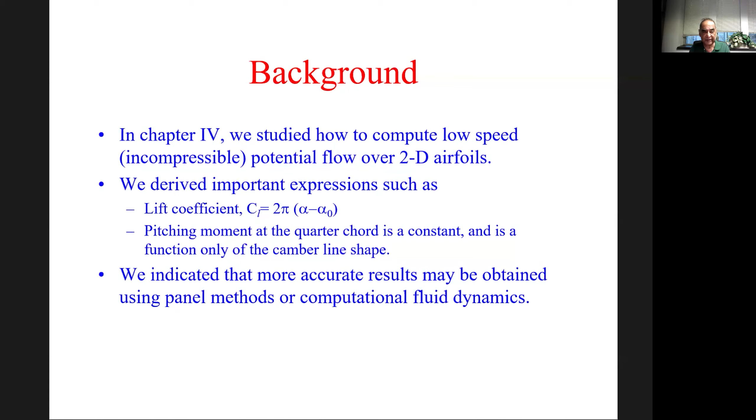Panel methods is used in X-Foil, you already practiced it, X-Foil work. CFD, we won't have time to practice it in our class, unfortunately, but we have a graduate course on CFD where they talk about a lot of the theory behind it. So let's quickly review what the two-dimensional theory gives us.

Basically, thin airfoil theory comes up with this dotted line for lift versus alpha, where it crosses the x-axis, where the lift coefficient goes to 0, is called the zero lift angle of attack, alpha when lift is 0. The slope is 2 pi when alpha is expressed in radians. Of course, in the real world, because of stall, the airfoil stalls here, and also stalls at negative angle of attack. If you keep pitching an airfoil up, it's going to separate on the top surface and stall there. If you keep pitching it downwards, it's going to stall on the bottom surface. So the black curve may have a slightly different slope.

So in our lecture in this class, we are going to call this A naught. A naught may be slightly lower than 2 pi. So if in an assignment, problem set, exam, or in your industry practice, this slope is available from experimental data, that's what we would use. But in the absence of experimental data, we will assume that the slope of the lift versus alpha in 2 dimensions is 2 pi.

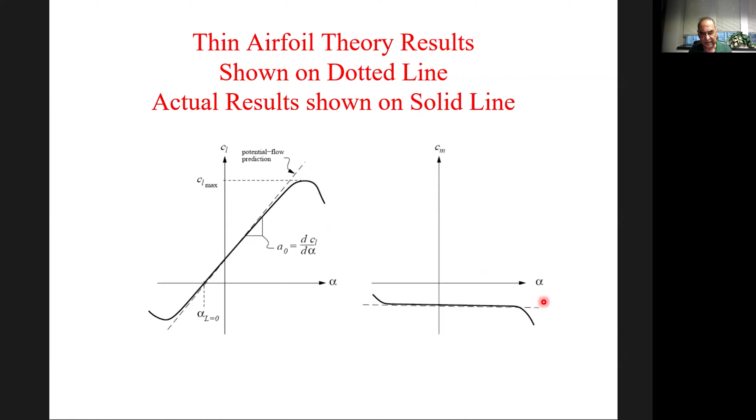Our thin aerofoil theory or a pure panel method will not give us drag. If you want drag, you have to go to boundary layer theory, some way of telling where is the laminar flow, where is the turbulent flow. We need some way of telling where the flow is separating - all that information should be known. Then you have to either numerically integrate the boundary layer equations, which are PDEs, or some integral form of the boundary layer equations. I promised to tell you how X-foil does the boundary layer, but I have to defer that. Maybe I'll just post it as a module for information purposes, because our course is primarily focused on inviscid flow, and I don't want to sidetrack into different venues where we may lose track of where we are.

But anyway, there's a minimum drag value. We came up with a very important concept called the drag count. Drag count is 0.0001, so it's the 4th significant digit - that 1 is called the drag count. When we plot this curve, it's very important to scale the vertical axis so we can resolve the drag variation from aerofoil A to aerofoil B. Otherwise we're going to be in bad shape - we won't know what's going on because they'll all look the same in this plot.

So this is not given by inviscid theories at all - you need boundary layer behavior. Why does the drag shoot up here? Because of the stall - same way it's because of the lower surface stall. Sometimes you'll get a bucket-like shape. We call it a laminar drag bucket because the drag is mostly laminar flow, then suddenly the drag jumps up. So that's called a laminar drag bucket.

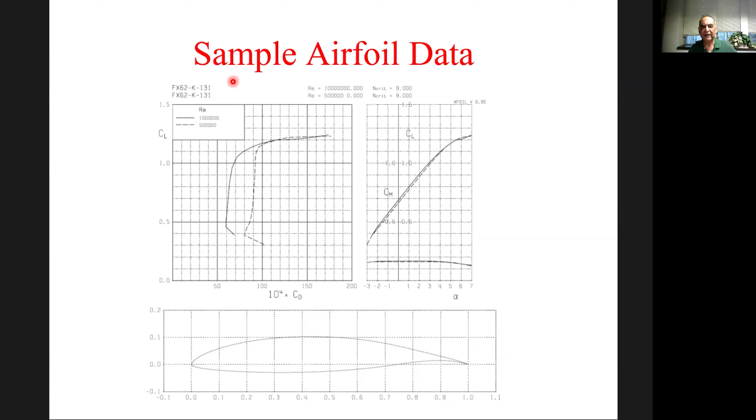Now we go to three-dimensional wings. Wright brothers had already flown their airplane in 1903. They had knowledge of drag - they knew they needed some kind of propeller to push the airplane forward. So they had a piston engine, very small powered, turning a two-bladed rotor to pull the vehicle forward - what you call a tractor propeller, at the front of the aircraft. Then they were propelling it forward. If you don't have a propulsive means, it becomes a glider, and then you're at the mercy of gravity - you use gravity itself to propel you forward.

So three-dimensionally, when people started flying these things, they found the lift curve was not 2 pi times alpha minus alpha naught - it was a little bit lower. So people who were building the aircraft, remember 1914 to 1918, there was a First World War going on. People already started using airplanes for military purposes, observation purposes, maybe just to take pictures, reconnaissance, that type of thing.

Germans even flew and dropped bombs over England, not during the Second World War, but even during the First World War. But those aircraft were very, very small. They could not carry a lot of weapons, a lot of ammunition, so the damage was minimal.

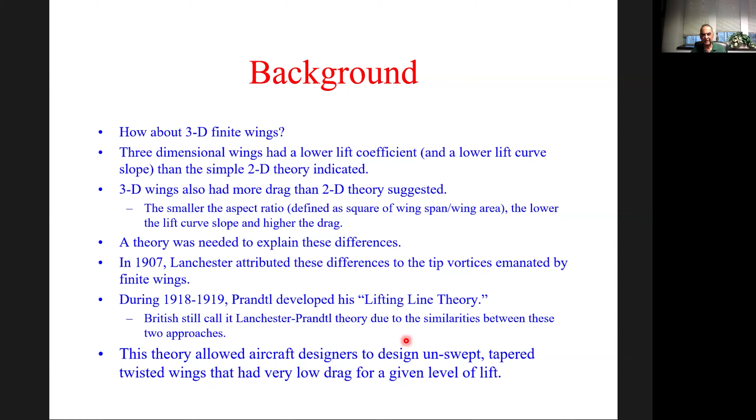So Prandtl came up with a very, very intuitive explanation. We will turn our attention to what causes this loss of lift and what causes this increase in drag - that's the first thing we are going to look at. So we are going to look at something called tip vortices. When the aircraft is flying, it generates vortices from the wingtip. We know that it's caused by the high pressure air from the bottom side flowing around the wingtip from both wingtips, rotating, swirling into a very clearly visible vortex.

Sometimes when an airplane is flying overhead, you'll see something called the condensation trail. Where did the condensation trail - what is the word condensation? It comes from the word condense.

So inside these vortices, you have a very high velocity. Remember gamma over 2 pi r, the point vortex equation? So when the velocity goes up that high, it not only draws its energy from pressure energy, but also internal energy, so the temperature drops.

When the temperature drops, the moisture in the atmosphere condenses. If you have just enough moisture in the atmosphere, when planes are flying overhead, sometimes you'll see two white trails. These are nothing more than condensed water droplets. When sunlight hits it, you're able to see it with your naked eye. So condensation trails were forming.

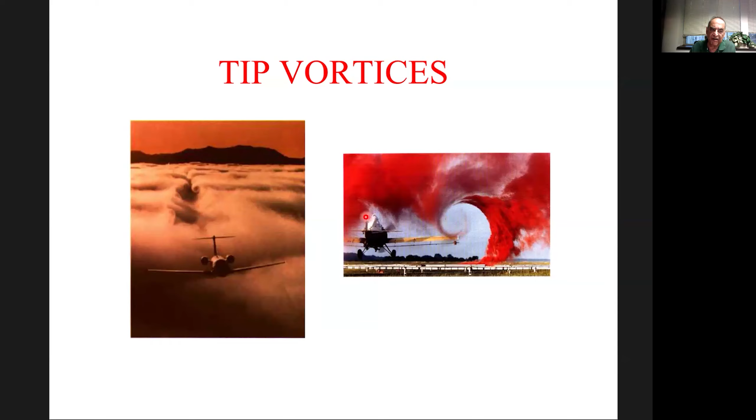So he said there are some vortices. Well, what do these vortices do? He said these vortices are going to induce a downward directed flow over the wing, which we call a downwash.

This is a picture you could do in a wind tunnel if you have some kind of sophisticated image velocimetry, like the one we have at Georgia Tech. You take a picture of a whole screen, introduce smoke particles, and see how fast they travel by taking an image correlation between two successive frames. You can process the entire plane automated.

But in Prandtl's time, you had to stick a probe at each and every point, take data and collect it. But regardless of how we collect it, we are getting this downward directed velocity, which we call downwash.

The farther apart these vortices, the larger the aspect ratio, the lower the downwash, at least near the center of the wing, near the fuselage. Of course, when you get closer to the vortex, you'll get a higher velocity. Remember that 1 over 2 pi r relation - the closer the distance, the higher the velocity. So this is called a downwash.

So Prandtl said the free stream is coming along its merry way, but when it sees this downwash developing over the wing, this vector and the downwash vector, which is pointing downward, when you combine them, the velocity vector becomes this new effective velocity vector. This line is the total velocity vector, which is a vector sum of the free stream velocity in the x direction and the vertical downward directed velocity in the z direction.

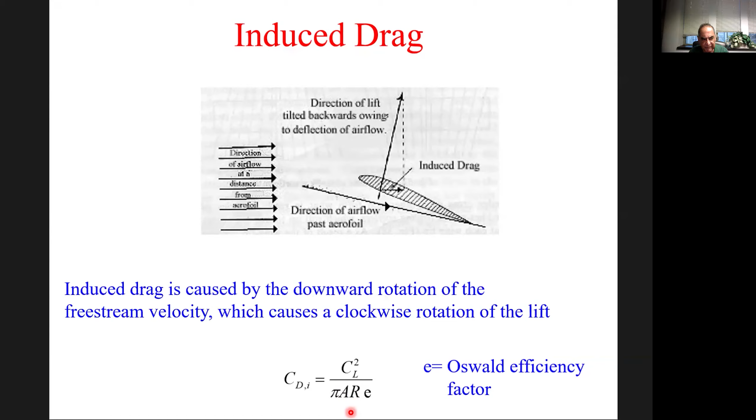So it's a clockwise rotation of the lift vector, which creates a backward directed drag force component in the direction of the flow.

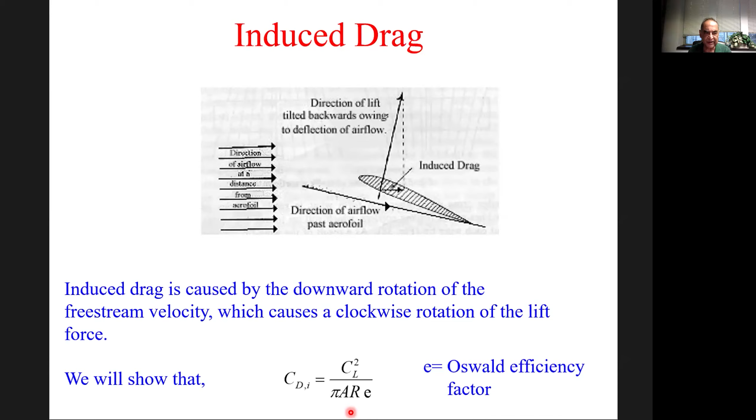So we are going to show this equation analytically. Prandtl then had to start modeling it, and of course Lanchester also started modeling it in England, independent of each other. At that time, remember we are talking about 1910, we didn't have CFD. We could not model any of these.

Today, in my undergraduate research, I have a 1 credit hour thingy with 4 or 5 assignments. One of the assignments is using a software called ANSYS to draw lifting flow over an airfoil. In our Canvas site, I do have some ANSYS resources at the bottom of the course if you want to learn how to do it on your own. But this is too far, too much, so he could not do it.

Even distributing the circulation over a camber line like Munk did and Glauert did was too much. So remember in our homework number 2, we lumped everything at a quarter chord point as a single vortex, which contained the same circulation as the circulation around this camber line in thin aerofoil theory, or the circulation over the complete aerofoil in the panel theory with the boundary layer. So he said, I'm going to lump all of this at the quarter chord point. In homework number 2, we just had a single aerofoil section, but now we have a wing.

So if you think of this direction as a y direction, streamwise direction is x direction. This circulation is going to vary from wingtip to wingtip. That's because right at the wingtip, lift will go to 0 because the bottom pressure and top pressure will become equal, because this is the edge. So the high pressure air from the bottom will flow around and equate to the low pressure air. So we will not have any lift at the wingtip.

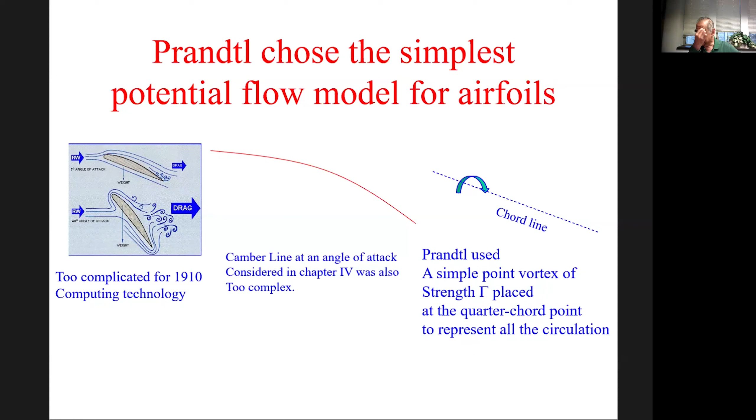Now, Prandtl had to do it in 3 dimensions, except now the problem was a little bit more complicated because this gamma was changing all over the place. It's not just one number. So he said, if I can somehow solve for this gamma, then I can find the lift and the lift coefficient. But there were some objections that were raised.

We are going to cover something called Helmholtz theorems. Helmholtz was a scientist, he also lived and died during the 19th century. Prandtl and Lanchester were developing these things in the early part of the 20th century. So Helmholtz was come and gone, he was dead, but his theorems were living on forever.

One of the theorems said a vortex strength cannot abruptly increase or decrease in space. There must be some physical mechanism that adds circulation, and there must be a physical mechanism for removing circulation.

One physical way of looking at it is vortices have fluid particles that are swirling about, they have an angular momentum. If the angular momentum cannot abruptly increase or decrease, just like a linear momentum cannot abruptly increase or decrease, there must be some physical mechanism that causes the change in the angular momentum. Otherwise, angular momentum must be conserved, just like linear momentum must be conserved.

A body in motion continues to stay in motion, like Newton's law said. A body in rotation, some of these ice skaters, they keep spinning. If there's no friction, their angular momentum will be conserved forever. They'll be spinning forever, right?

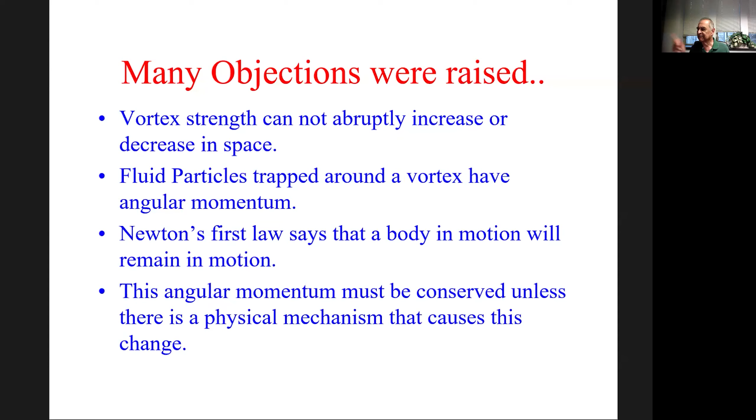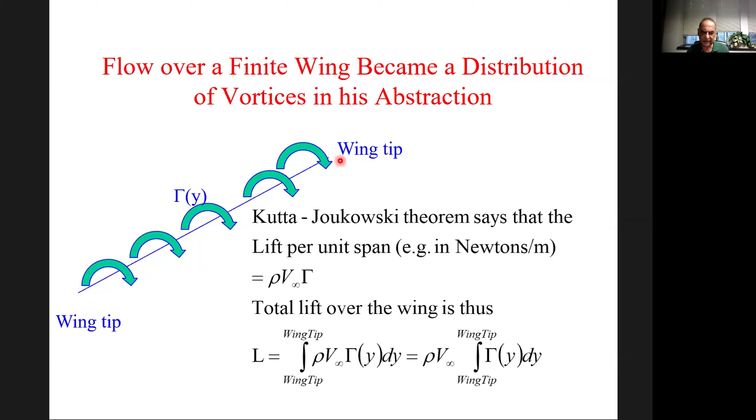So objections were raised to this model, especially abruptly increasing or decreasing the circulation without rhyme or reason. So Prandtl said, I do need an explanation for it, I do need a physical model for this. So the Helmholtz theorem, which I will give you the proof of next lecture, said this is not good, you cannot be changing the spanwise direction gamma abruptly. So Prandtl said, okay, I'm going to overcome this, I'm going to really physically introduce some trailing vortices.

Not only from the tip do I get these vortices, anytime circulation changes from gamma 1 to gamma 2, I'm going to be feeding circulation of strength gamma 2 minus gamma 1. Think of it like an electrical current. If I go from 1 ampere to 2 ampere, I have to add 1 ampere current at this junction.

Circulation works the same way. Anytime circulation changes, you have to either bring in circulation, using the right-hand screw rule, or remove circulation. So here, if you go from a circulation of 3.5 to 3, you are removing 0.5 circulation, and it should be removed by these vortices. These vortices are very, very weak, that's why we normally do not see them with our naked eye. But sometimes you can, for example, when the flap is deflected, you'll see vortices coming off it.

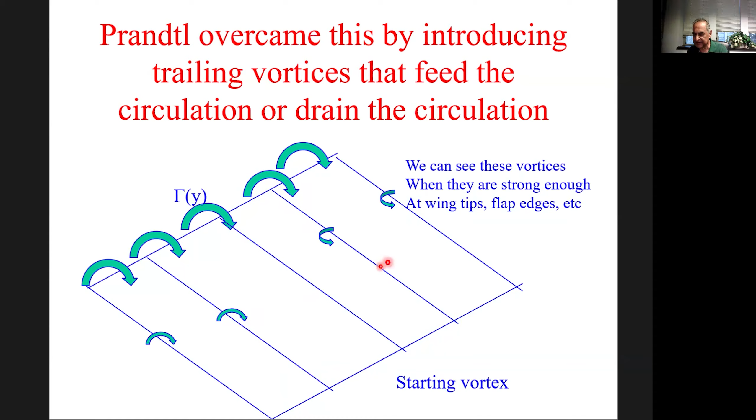Let me show you a physical picture of it. I'm going to go to a browser and search for flap edge vortex. Sometimes you get good ones, sometimes you get bad ones, so I do not know what I'm going to get here. This is a paper, I don't want it, I want an image. Let me go in here: flap edge vortex.

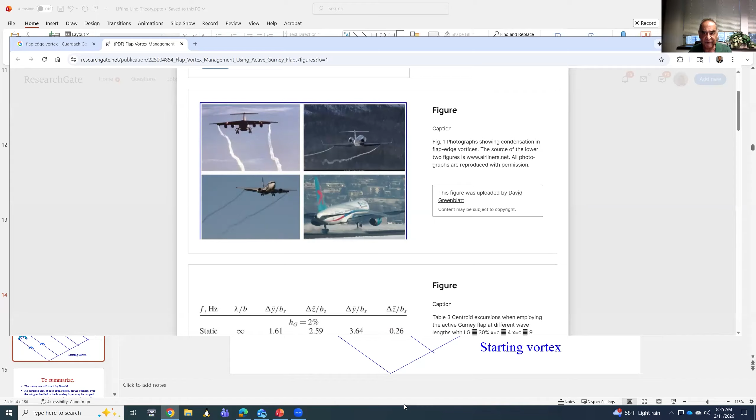Here again, the same picture is shown. So there's plenty of visual proof that this should be needed. Prandtl said, I'm going to generate a whole bunch of straight line vortices, an infinitely large number of them. They all either bring in circulation or remove circulation. When they bring in circulation, using the right-hand screw rule, when the screwdriver advances towards this line, circulation is going to increase. When the right-hand screw retreats from the lifting line, it's going to remove circulation. This, the quarter chord line, is called the lifting line because that's where we concentrate all our lift from root to tip, wingtip to wingtip.

Then people said, how about these vortices, where do they end? Prandtl said, easy, that's the starting vortex we talked about earlier. So these vortices have a mirror image out here, the starting vortex. If this is plus 2, this is going to be minus 2. If it's plus 3, it's going to be minus 3. So just like you have a bound circulation over an aerofoil, there's an opposite circulation over the starting vortex. Everything perfectly cancels. This starting vortex is eventually infinitely far away from the wing, so it does not affect what's going on the wing. But these vortices are very close to the wing, so we need to account for their presence and do something about it.

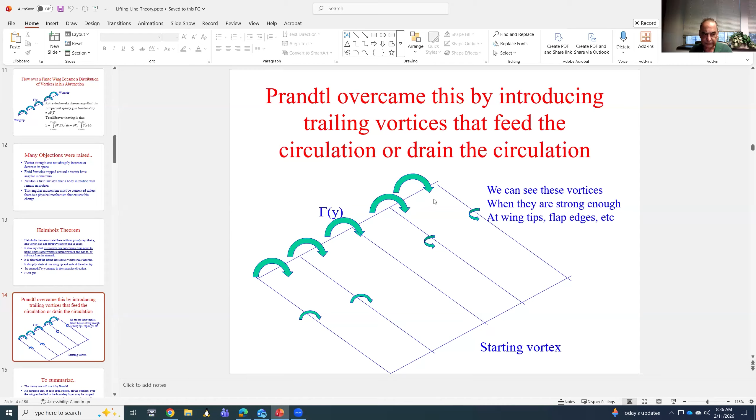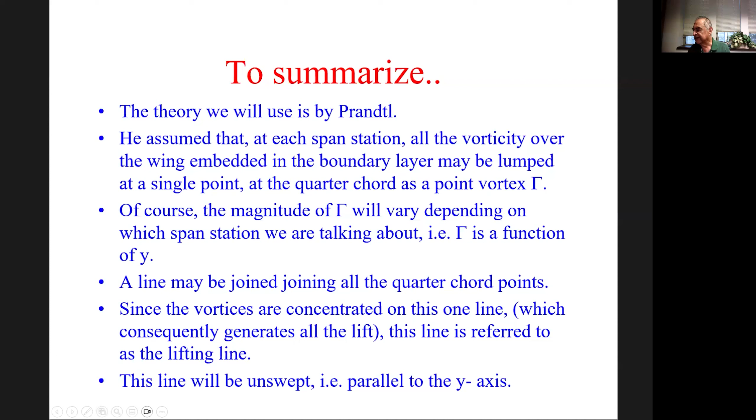Prandtl developed a theory for it, which we are going to go over in our lecture. So in summary, at each span station, all the vorticity is lumped into a vortex called gamma at the quarter chord. Gamma is going to vary along the y direction, the span-wise direction. To the pilot's left will be minus half a semi-span, b over 2, where b is the span. To the pilot's right, it will be plus b over 2. So y will vary from minus b over 2 to plus b over 2, and gamma changes along y. That line is called the lifting line, and in our current theory it is unswept. Later on, we're going to include the sweep effect.

What did we give up? We lumped everything at a quarter chord point so we can get lift, but we can't get a pitching moment. Just like in homework number 2, you got an expression for CL, but you did not get an expression for CM. Thin aerofoil theory, because it distributed the lift, knew how much was generated near the leading edge and how much near the trailing edge, so it could compute the pitching moment, but not in this model.

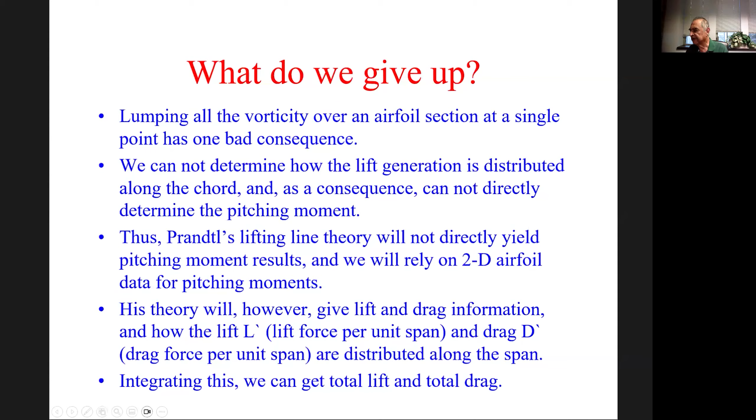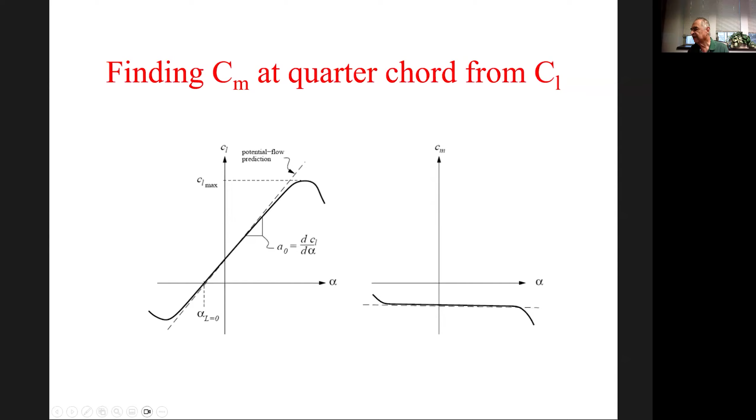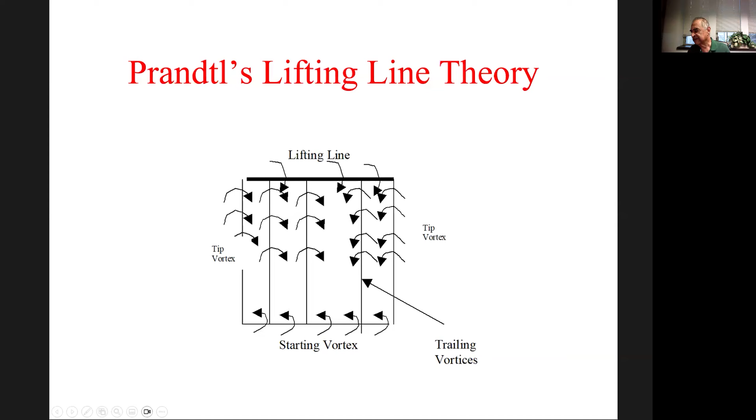Prandtl said, I need to compute the downwash if I'm going to handle the drag or rearward rotation of the lift. If I have a lifting line and pick a point—remember in homework 2 we picked the control point at the 3/4 chord point—in Prandtl's theory, he applies the boundary condition directly at the quarter chord point itself. It turns out if you do it at the 3/4 chord point, you could handle a swept wing; without it, you cannot handle sweep effects at all. But in those days, First World War aircraft did not have much sweep, so he didn't have to worry about it.

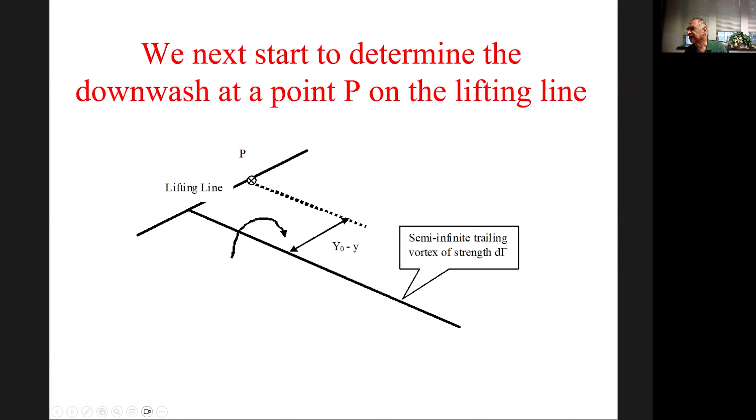So if a vortex is separated from the point where I'm computing the induced velocity by some distance, y minus y naught—we don't need to know which is y naught—the vortex produces a downward directed velocity, this clockwise vortex, at point P. We can compute this downward velocity in 2D pretty easily: it's gamma over 2 pi r. So if you put a vortex here and ask what is the downward directed velocity, it's gamma over 2 pi times the distance between the vortex and where I'm applying the boundary condition. In homework 2, you put the vortex at the quarter chord point and applied the boundary condition at the 3/4 chord point—same principle. This is what happens in 2D.

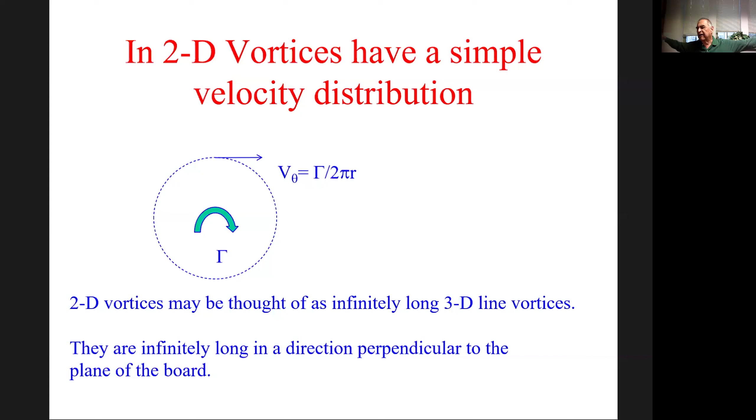But 2D vortices are infinitely long. If you think of this as a plane, the vortex comes towards you from the computer screen infinitely, and also goes into the screen infinitely the other way—it's an infinitely long vortex, going from minus infinity to plus infinity.

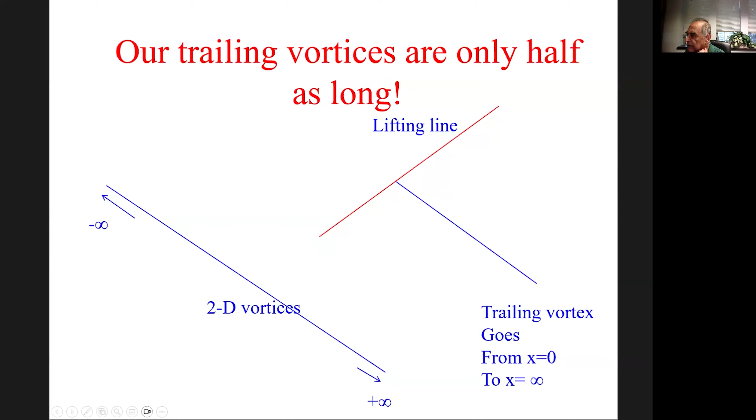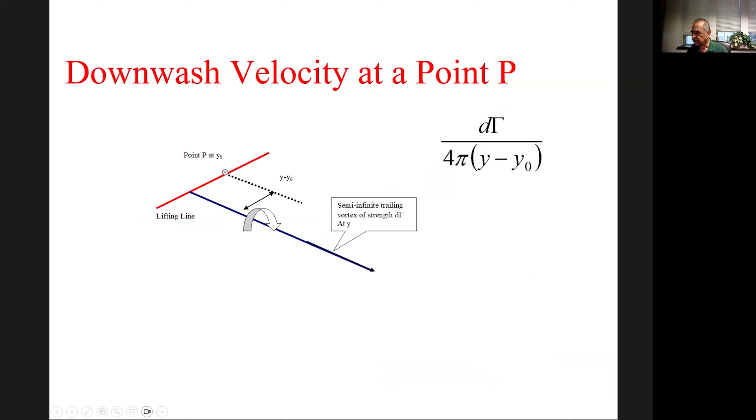But in the case of a lifting line, it's only half as long—it goes from 0 to infinity. So we have to analytically integrate the Biot-Savart law, which we alluded to in our last lecture on 3D building blocks, from this point all the way to infinity. If you integrate the Biot-Savart law from x equal to 0 to x equal to infinity, you get the downward directed velocity from a vortex as half of the 2D case. The 2D case is twice as long; this is half as long. So it turns out the induced velocity is not gamma over 2 pi times distance, but gamma over 4 pi times distance.

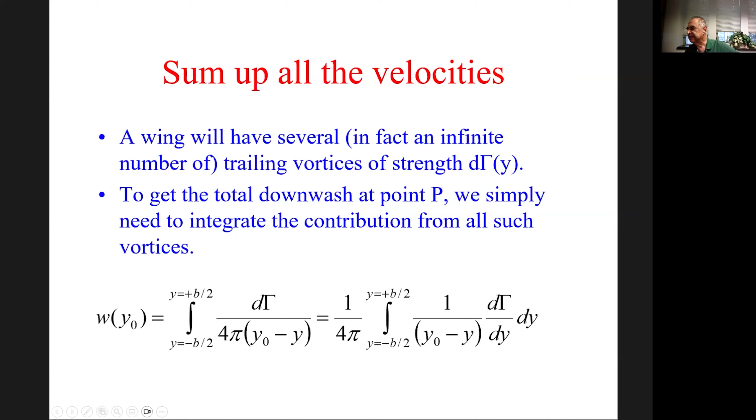So he said, if I integrate this, I can get the total downward directed velocity by integrating from wingtip to wingtip. The downward directed velocity, which we call the downwash, at any point y naught on the wing can be integrated to get this expression. There was one big problem: the unknown is we don't know how the circulation is changing along the wing. So this is an integral with an unknown buried inside it—we end up with an integral equation. This is the downward directed velocity.

Prandtl said the downward directed velocity will produce a rotation of the lift vector relative to V infinity. This is the original V infinity, and now I vectorially add this downward component to get a new V infinity. This rotation angle he called the induced angle of attack, which is the arctan of downwash divided by V infinity, opposite side over adjacent side.

He said I can find my lift coefficient as 2 pi, or whatever A naught is, the lift curve slope, times alpha minus alpha naught, minus this additional reduction in the angle of attack, the effective angle of attack. That's why I get a lower lift in 3D for a wing. He physically and intuitively explained that we get lower lift in 3 dimensions because this downwash reduces the angle of attack. Therefore, each section produces less lift, and therefore the total wing produces less lift.

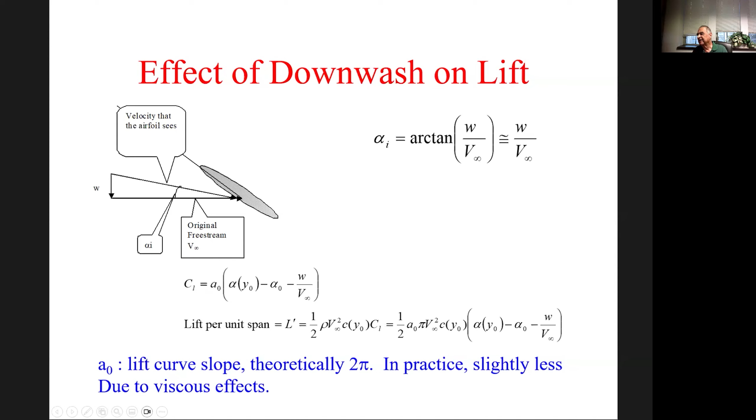So Prandtl said, I'm going to assume a solution for gamma and see what happens. That's the best I could do. I'm going to assume a functional form of gamma, put it into this integral, integrate it, solve for alpha, solve for W, solve for the loss of lift. By the way, if I know this angle, I know my rearward rotation of the lift vector. So if I know my lift vector's rearward rotation, L prime times sine of this alpha will be my drag, so I can also get the induced drag.

He said I'm going to analytically assume a solution and see what happens. So drag is, if I know this angle somehow, it's the same angle here. The lift is here, lift times this vertical thing is lift, this is the total lift. So this angle times lift, you could think of it as sine of alpha, which is tan of alpha, which is W over V infinity. Again, sine of alpha equals tan of alpha equals alpha when alpha is small. So this induced angle of attack is of the order of a few degrees, 1 or 2 degrees in practice, therefore he could justify small angle assumptions.

So Prandtl said, I'm going to assume an elliptically loaded wing. What do we mean by that? This function of gamma varies from wingtip, called y equal to plus b over 2, to the pilot's right, and on the other side of the y-axis, minus b over 2. So from minus b over 2 to plus b over 2, if I draw this curve, it looks like half an ellipse. This is the minor axis, this is the major axis. So y divided by semi-major axis squared, plus this vertical distance divided by semi-minor axis squared, equal to 1 is an equation of an ellipse. He assumed an elliptically loaded wing because it turns out this produces the lowest induced drag, which is why it's of particular significance. So he said, I'm going to assume a functional form.

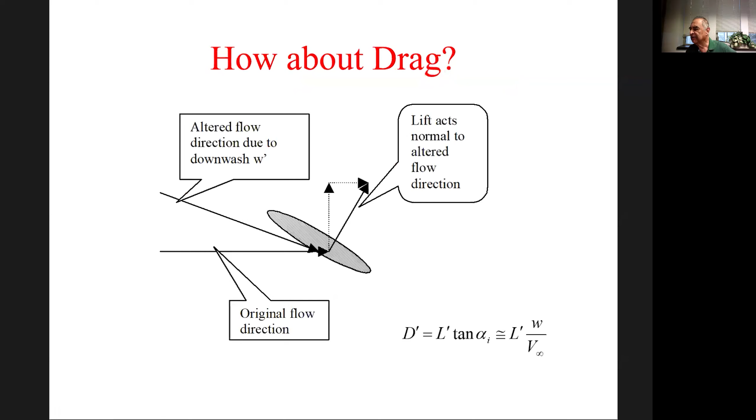I'm going to plug it in here and see what happens. As soon as he did that, he had all kinds of complications. It was hard to integrate this integral, hard to solve analytically. So even Prandtl knew he had to do some kind of change of variable. You remember in Calc 1, if somebody gives you an integral you can't solve, you change the variable and see whether you could do something better. That's what Prandtl also did.

So he assumed that y varies as minus the semi-span. B is the span, B over 2 is half the span, called semi-span, times cosine of theta. That means to the left side, theta is 0. To the right side, theta equals pi. Cosine of pi, or 180 degrees, is minus 1, so minus of minus 1 becomes plus 1. So the right side of the wing is plus b over 2, left side is minus b over 2. The angle varies from 0 to 180 degrees, 0 to pi.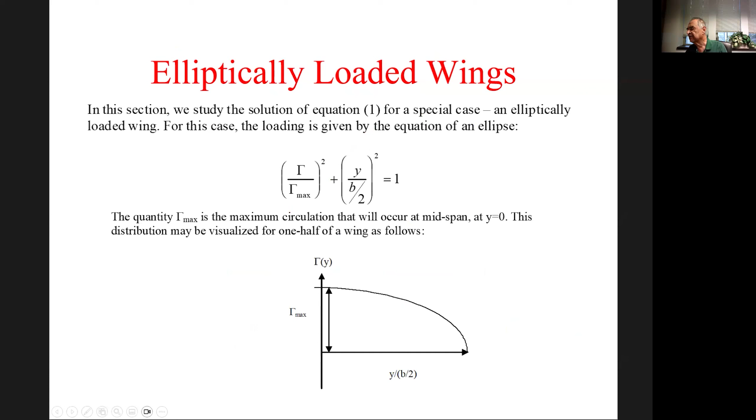The point where we are computing the downwash, point P, uses the same relationship. If you plug this y into the equation, y equal to minus b over 2 times cosine theta, this becomes cosine squared theta. You can bring it to the right side. 1 minus cosine squared theta is sine squared theta. If you take the square root, gamma becomes equal to gamma max times sine theta. Then you can find the differential of gamma as gamma max times cosine theta d theta.

By the way, this is the first term in a Fourier series. Glauert is going to produce a long, infinitely long series. In your homework, you'll take the first couple of terms and solve for it by hand. In my MATLAB code, I'll take 10 to 20 terms and show you how to solve it on the computer. I hope you're able to follow this along.

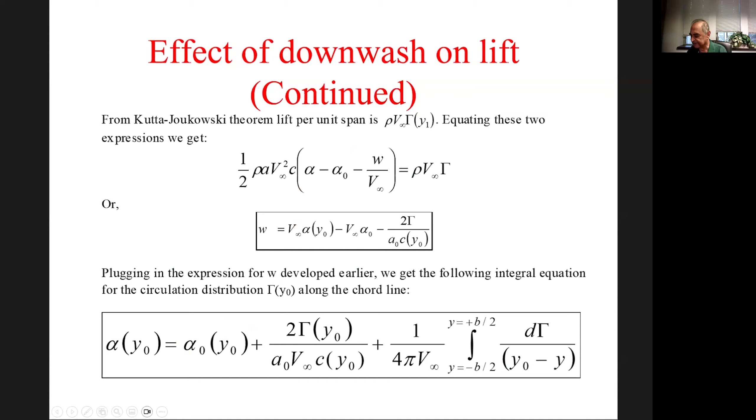So he put this d gamma and gamma into the expression, and replaced y equal to minus b over 2 cosine theta, minus b over 2 cosine theta naught. The integral went from 0 to pi, so he analytically integrated it, since there were nice tables of integrals available. This gave him the analytical expression for the downwash as the maximum value of gamma, at the middle of the wing, which is the peak value, divided by 2 times the span of the wing. So the larger the span, the lower the downwash.

He had to take advantage of a table of integrals relationship. In your homework number 3, you would not need any table of integrals. It's all been worked out in the theory, so it's purely a numerical problem.

For an elliptically loaded wing, this downward directed velocity, the downwash, is going to be uniform. Theoretically, it turns out this is the best, and as a result you get the lowest induced drag. If you have a non-uniform, bumpy downwash, you're always going to get higher drag. So downwash is a constant, and theoretically it turns out to be the best from an induced drag perspective.

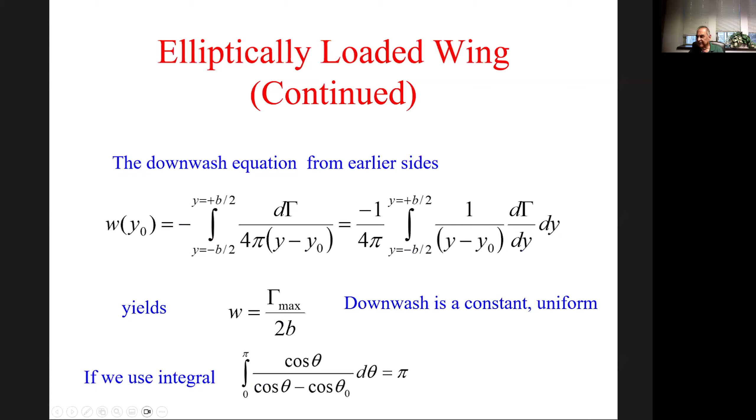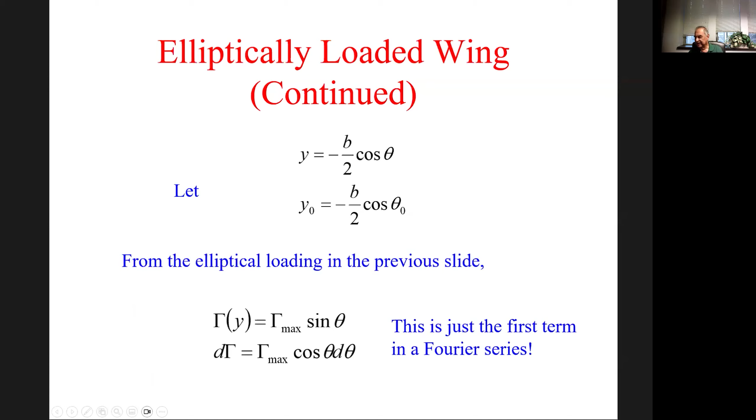How about lift? I'm going to integrate gamma dy, he said. So plug in for gamma this relationship, plug in for dy, minus b over 2 cosine theta. If you do it, sine theta d theta, the minus will go away. Plug it in, and you get for the lift basically this number, so the maximum circulation could be found in terms of the lift.

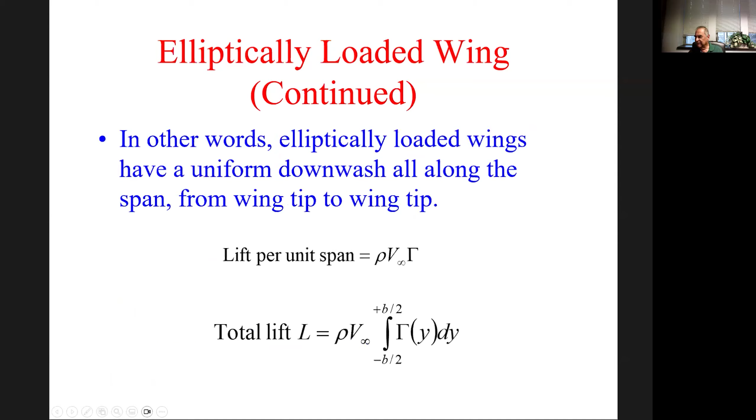Why do I need the maximum circulation in terms of the lift? Because then I can find my downwash. Why prefer lift? Because lift equals weight of the aircraft, so all these properties are known. So we can find the maximum circulation, we can find the downwash, and once you have the downwash, you can solve for the drag coefficient.

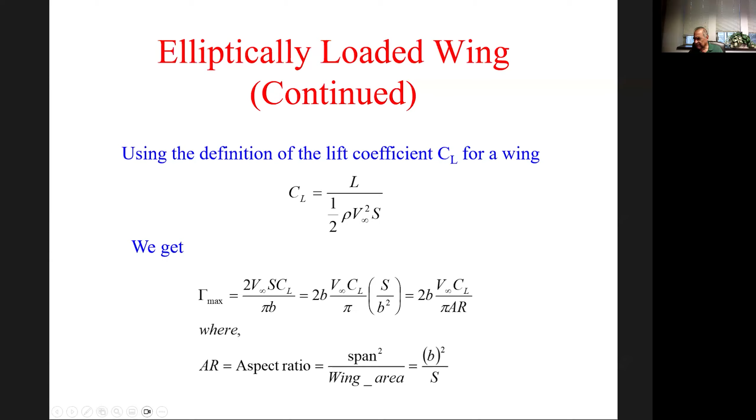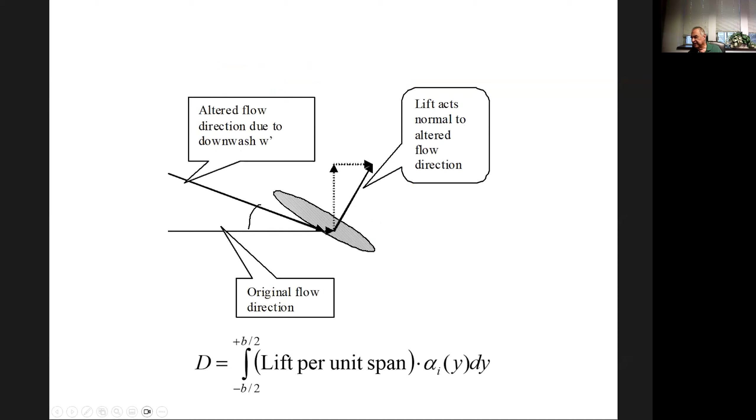Find the gamma max, find the downwash, then find the induced angle of attack. These are some intermediate expressions. Then his drag became the rearward tilt of the lift, so lift times alpha-i dy. Lift is rho v-infinity gamma. I know I'm throwing a lot of equations at you. Rho v-infinity gamma dy.

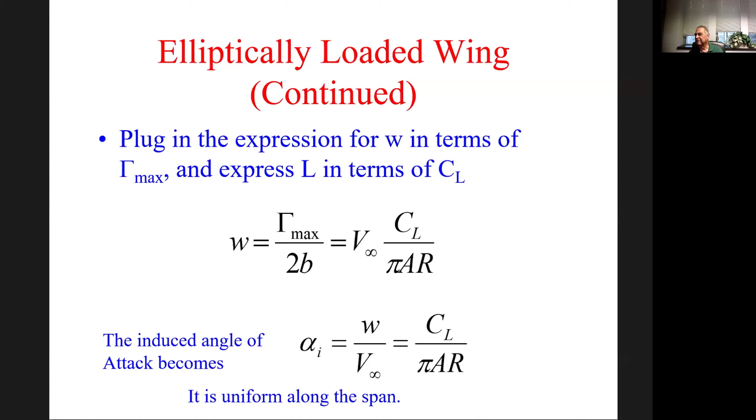Downwash is known, so he integrated for this simple elliptically loaded wing. He was able to analytically integrate everything, and so he got this as the induced drag. This is the lowest possible induced drag for a given lift coefficient.

So designers, if you work for Gulfstream, Boeing, Airbus, Embraer, a Chinese aircraft company, Air India, or Hindustan Aeronautics, they're going to ask you to come up with the lowest possible induced drag. Of course, you're limited also by the aspect ratio. So you can twist the wing, taper the wing, try to come up with an elliptically loaded wing. That's the goal.

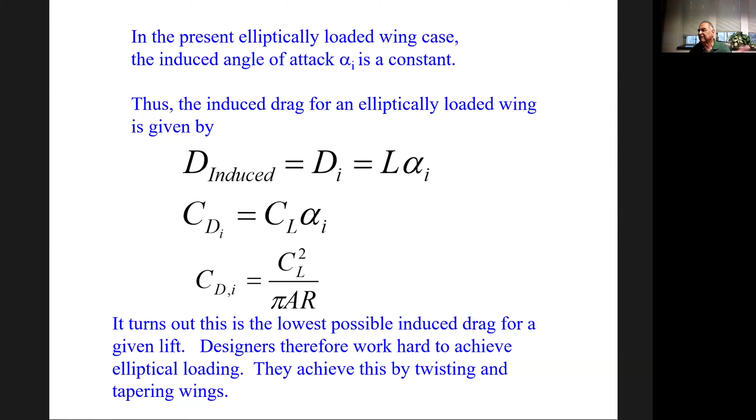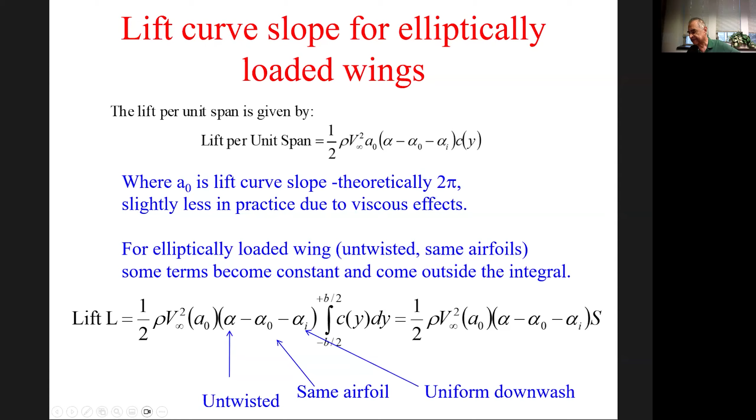Okay, now for the elliptically loaded wing, if you have the same airfoil, same alpha, or an untwisted wing, alpha is just a constant value, not changing from root to tip. Same airfoil means same lift curve slope, same angle of zero lift. When we integrate, all these constants come out of the picture. Then the chord, when you integrate chord versus dy, it's just the projected area of the wing, which is the wing area. So for an elliptically loaded wing, untwisted, with the same airfoils, you get a lift like this. He was trying to get an estimate for the lift curve slope.

So he said, if this is my lift, now my alpha from an elliptically loaded wing is this number from the previous set of equations. Put it in there, bring it to the left-hand side, group all the CL terms. Then if you do dCl/d alpha, the three-dimensional lift curve slope, it's not 2 pi like test data from an airfoil test, it's 2 pi divided by some factor greater than 1. This is why 3D wings have a lower lift curve slope than 2D airfoils, and therefore the 3D wings produce less lift. The smaller the aspect ratio, the bigger this denominator, the lower the lift curve slope, lower the lift. So Prandtl was able to explain all of this for his elliptically loaded wing.

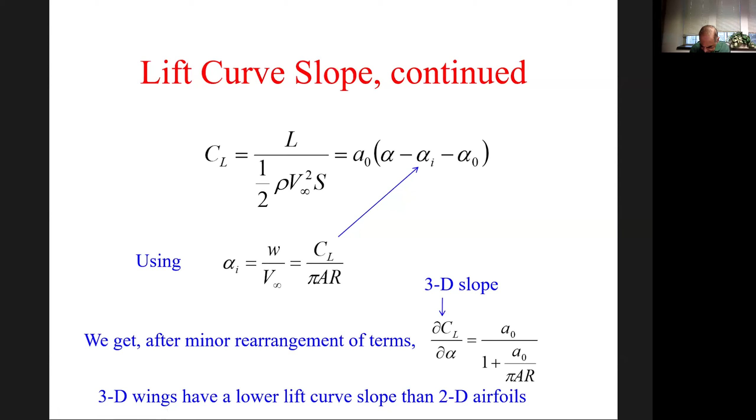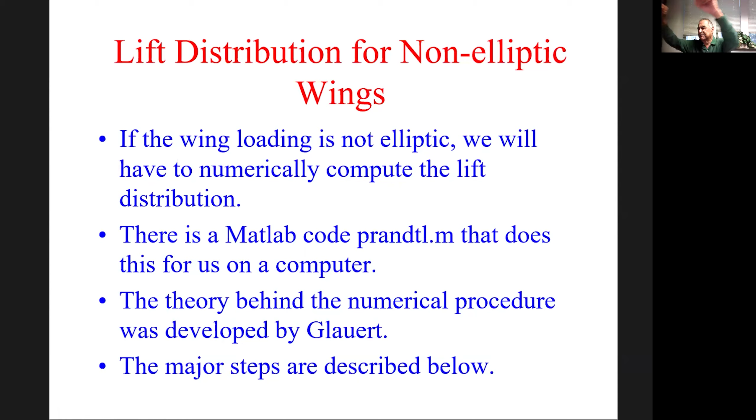Then came Glauert. Glauert said, I'm going to assume a non-uniform, not an elliptically loaded wing, but a general wing. This part I will go over again on Monday - but today I'm skipping the MATLAB code part of it. Glauert is going to do it a different way than Prandtl did, for a more general lift distribution, not just a pure ellipse, so everything has to be a little more complicated.

So he used the same transformation like Prandtl did - again the integral goes from 0 to pi. But rather than assuming an elliptically loaded wing, which produced gamma equal to gamma max times sine of theta, just one term in the Fourier series, he assumed an infinite series. Again, we are going to stop with just the first two terms in our homework number 3, A1 and A3, truncated - but you can keep more terms.

It turns out you have to keep only the odd terms, not even terms, and you should not have a cosine n theta. In the classroom on Monday I will explain: if we keep even terms - sine of 2 theta, sine of 4 theta, etc - because theta goes from 0 to pi, on one side you'll get a positive wing, on the other side a negative wing, then you'll get an unbalanced rolling moment. So for symmetric left and right, steady level flight, we cannot have an even term - sine of 2 theta, sine of 4 theta, sine of 6 theta. They will produce unevenly balanced lift.

That's why we do not keep the even terms. Also, we do not add cosine n theta terms like in a normal Fourier series, because when theta goes to 0, cosine of n theta is +1 or -1, so you get a finite lift at the wingtip, at theta 0 or pi. We know that we cannot have any lift there. This guarantees when theta equals 0 or theta equals pi, circulation is 0. So that's why we keep only sine terms, and only odd terms, so that the left and right side of the wing produce the same lift.

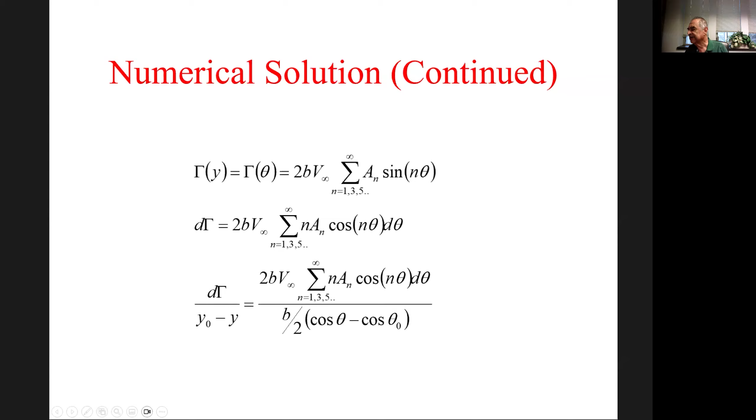Then he was able to take a differential of it, substituting y naught and y, changing variables like Prandtl did. So now he got a series expression. Each and every term in the series had to be divided by this number, so b canceled out. You still had a v infinity hanging around somewhere here, and you got some expression. Remember, circulation is a distance times velocity, so we bring in the distance unit and the velocity unit - these coefficients are non-dimensional numbers. So all of these are non-dimensional; the dimensionality is buried in the coefficients up here.

Now, integrating for the W, take this expression, throw it in here, integrate it. You get a bunch of integrations for each and every term, but they could be integrated using a table of integrals. So you get this expression for the number.

Prandtl just had one term, so he just had sine n theta by sine theta, sine 1 theta by sine theta. So this became 1, and alpha I was just one constant. Whereas for a general wing, it's going to vary, alpha I is going to vary all over the span, depending on where this theta is located.

But theta is a function of where you're computing it, which is the y. So Glauert's is a more general expression. Again, in our homework, we're going to do A1 and A3. And now, throw all of these things in here, analytically integrated.

Now we get a linear equation for A1, A3, A5, A7, and so forth. In our homework, you will do just 2 terms. My MATLAB code you can keep 10 terms, 20 terms - you just change a number, then you can solve for it.

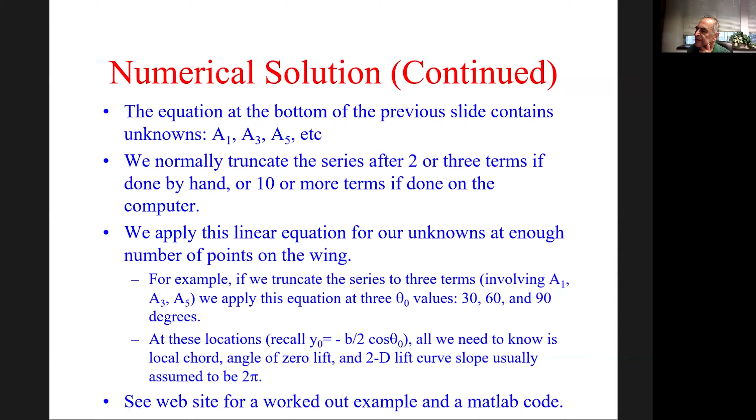But how do I solve it? Then how do I get lift? How do I get the drag? That's the important question, right? So after you solve for A1, A3, A5, etc., I'm going to do a worked out example in a minute. I may not be able to complete it, but you'll be able to look at it and follow your homework in that process.

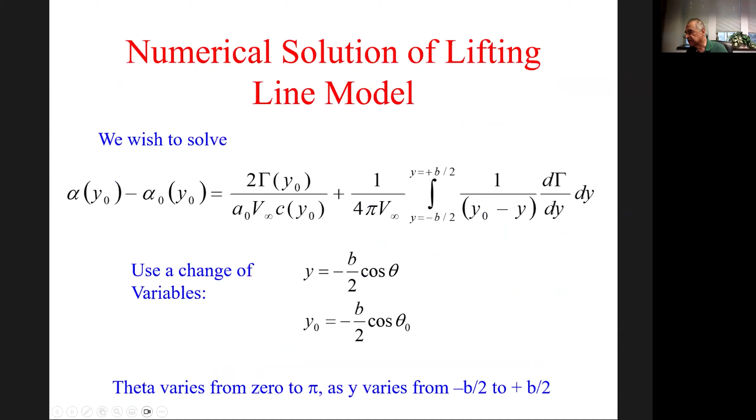So once you have the gamma this way, all you have to do is rho v infinity gamma is L prime. So rho v infinity gamma, integrate with respect to dy. Remember, y is minus b over 2 cosine theta, so dy is plus b over 2 sine theta d theta. Plug it in here and then integrate for the lift.

Only you'll get a sine - only the first term will contribute, sine theta times d theta. All the other terms, sine of 2 theta times sine of theta, sine of 3 theta times sine of theta, because of the orthogonal nature of the functions, they'll all go to 0. So you get a lift value just from the first term.

Again, you can find other terms and find a downwash. Then once you have the downwash, if you take the lift multiplied by the downwash and integrate it, you'll get a drag - remember the rearward tilt of the lift times sine of alpha i, which is this number. So lift includes gamma, circulation, and W is a function of circulation, so multiply them and take an integral.

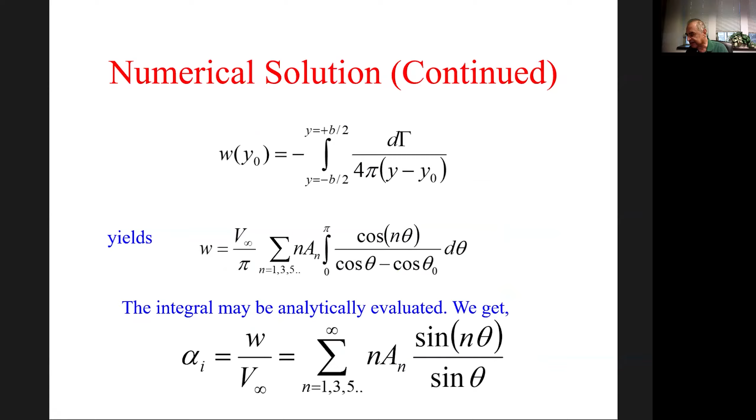After some algebra, you get an expression like this, where the leading term is Prandtl's lifting line result for the elliptically loaded wing - that's the lowest possible drag. If you have any other wing, you get extra drag. That's why we say that the elliptically loaded wing is the ideal wing.

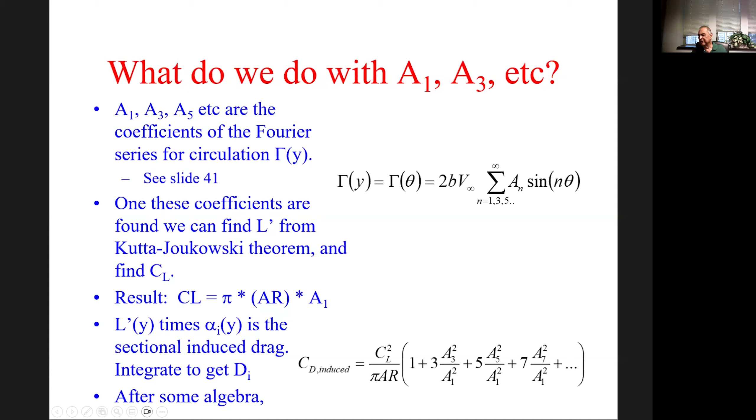Practical wings will have a slightly non-zero A3, A5, etc. So you need to find A3, A1 to correct for it. In your homework, you're going to keep just 2 terms, A1 and A3, so you'll find this extra term. We are neglecting A5, A7, etc. In my computer code, you can keep 10 terms, 20 terms if you like.

All right, now very quickly, I have a worked out example here. Our homework problem is very similar to it. If you think of the span as B, and the chord is C, rectangular wing in our homework, aspect ratio is very easy, right? B squared is the span squared, wing area is B times C, therefore the span divided by the chord is the aspect ratio.

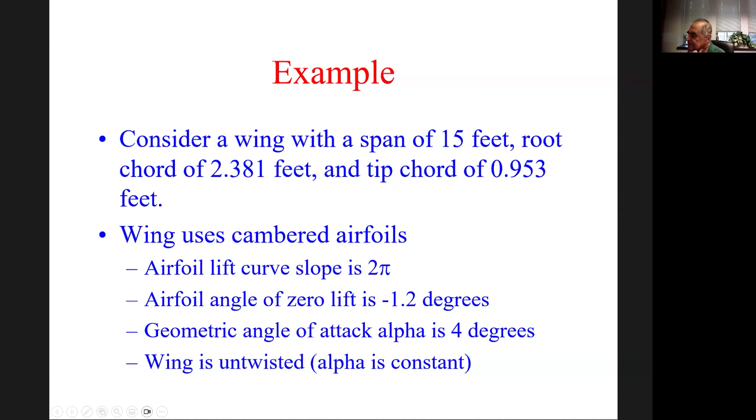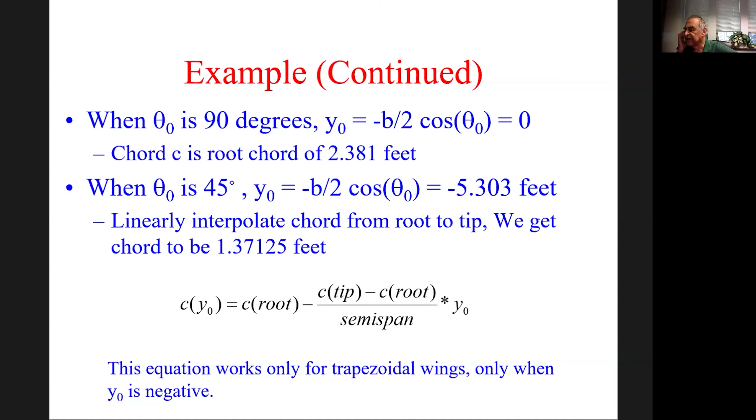In your homework, I'll stop in a minute — you're doing a problem very similar to this, except there's no taper, so the chord is constant and span is constant. You can solve this with a very similar approach. It's a symmetric airfoil, so the zero-lift angle is 0. I've given you the alpha, so you can solve for the CL at 4 degrees. CL at 0 degrees is 0, since it's a symmetric, untwisted wing in my homework. So the lift curve slope is delta CL by delta alpha — that is CL at 4 degrees divided by 4 degrees in radians. That gives you the lift curve slope. So in my homework, I'm asking you to find the lift curve slope, and once you know the CL at 4 degrees, you should be able to solve for it.

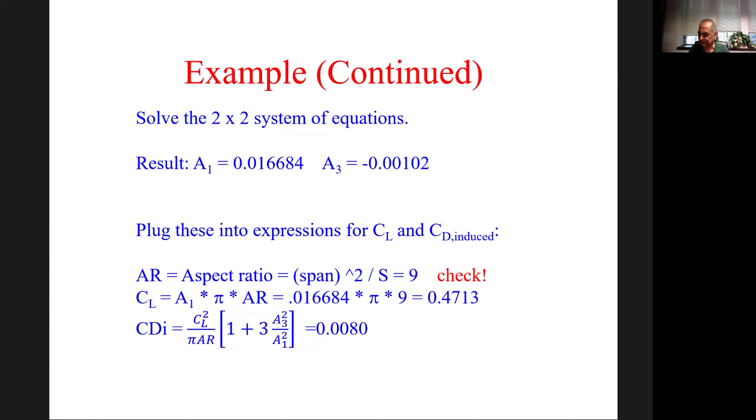Thank you. Professor, yes. I have, yeah, one question — could you speak louder, please? Can you hear me? Yeah. Can you please go back to slide 23? Okay, let's see.

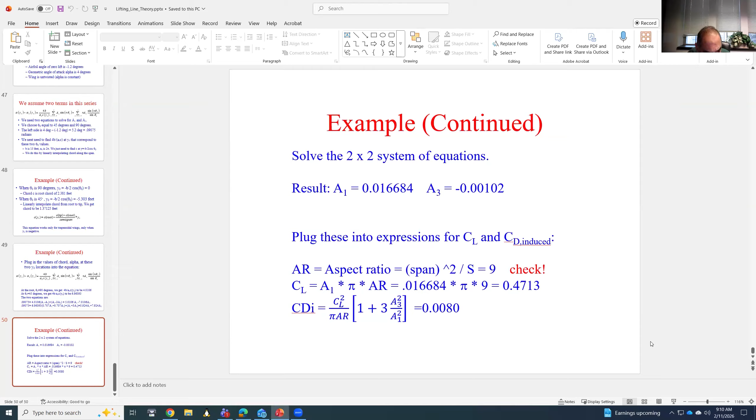It's very mathematical, I just didn't understand. When computing the downwash, we have y naught minus y, but in further calculations it's changed to y minus y naught. Is there a reason for this? You could take the vortex as y naught and the control point as y, or the vortex as y and the control point as y naught. It's just the distance between the two.

If I express gamma as a function of y naught, then my control point will have a y, and the integral will go from y naught from minus b over 2 to plus b over 2. Very good catch, but it doesn't matter as long as you call one a running variable that you integrate over, and the other a fixed point.

Thank you. Any other questions? Let me look at the chat box to see if there are any other questions asked here. I don't see any other question.

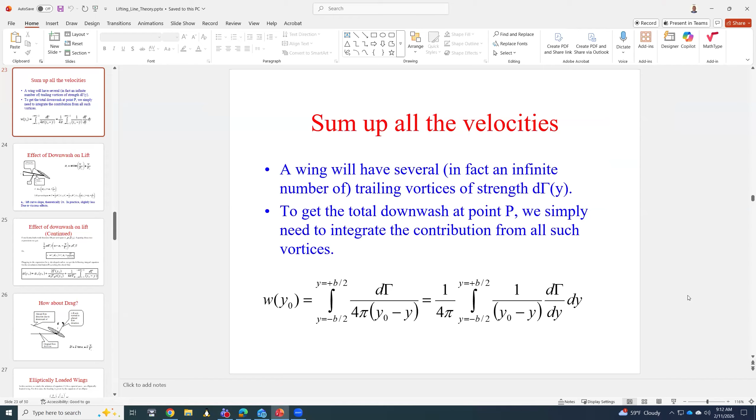Good morning, Professor, I have a couple questions. First off, previously we said there is circulation on the top surface of the airfoil and on the bottom surface, with both being in opposite directions, and we concluded that the net circulation of the entire airfoil goes clockwise because the top surface circulation is stronger than the bottom. Can I know why the top circulation is stronger than the bottom?

Remember that circulation produces the velocity distribution, and the velocity distribution produces the pressure change. On the top surface you want a lower pressure, so we want to add to the free stream velocity. Remember, a clockwise vortex produces a left-to-right velocity on the top and right-to-left velocity on the bottom. With the lifting cylinder, if you spin it clockwise, it produces lift upwards; counterclockwise produces downward lift. So by hook or crook, by either changing the angle of attack or the camber, we should achieve higher clockwise vorticity on the top than the bottom to produce lift. Otherwise, it produces a downward directed lift.

So to summarize, it's mostly because at the top there is lower pressure, meaning higher velocity, hence higher circulation, hence the net circulation is clockwise on the entire airfoil. Correct. Pressure difference is the result, the cause is the clockwise vorticity. Got it, so we cannot say the pressure causes the vortex to spin clockwise. We should say the vortex spins clockwise, and that produces this pressure distribution.